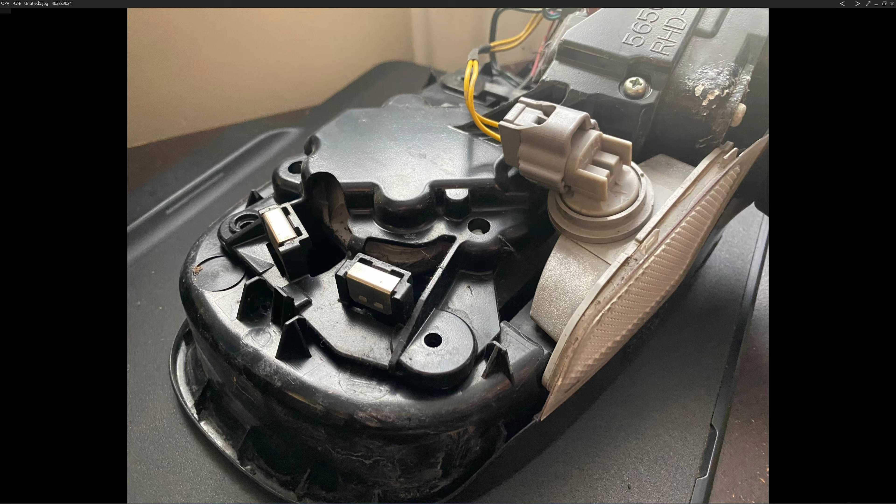Hi, in this video I'm going to do reverse engineering of this side mirror cover. It's a Lexus IS250 from the year 2006. This was sent to me by a viewer from this channel. He wants me to demonstrate how to reverse this part from the 3D scan data.

This mirror cover is almost 20 years old. It's possible that if you break it, you're not going to be able to find a replacement part, because most of the Japanese car manufacturers will keep their part stock for 10 years after they stop manufacturing the car. If you want to get the replacement part, you probably need to find it from the junkyard.

Okay, the part is made from injection molded ABS plastic. It has a standout edge here that represents the letter L, I think, which is the Lexus logo. Okay, so if you look from the inside, the side mirror contains a lot of mounting holes and clips. I can count 7 fixing points on this. So I will model the clips and the mounting points separately, because if I print it together with the cover, it's going to break easily.

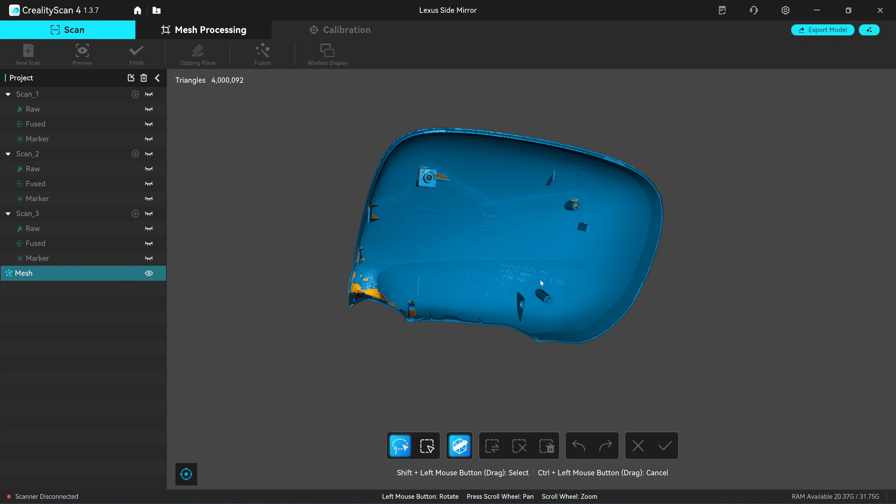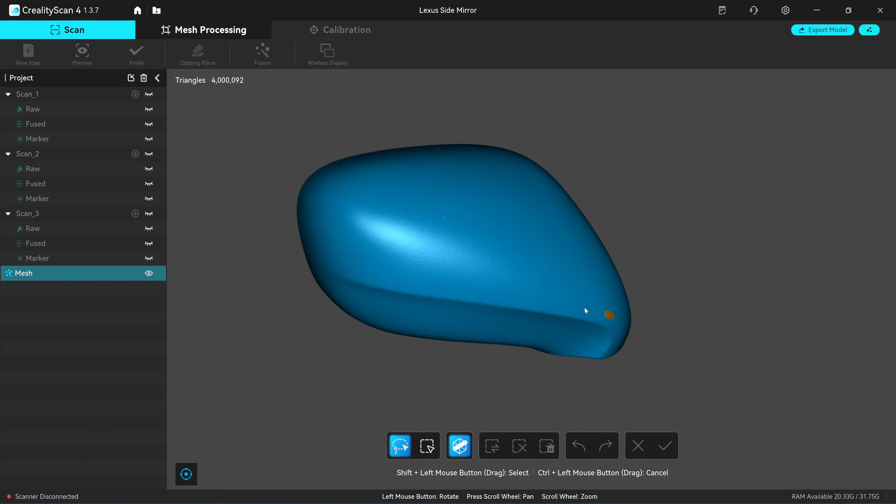Okay, this is the scan data that the viewer sent to me. He scanned the outer shell and the inner shell with 2 separate scans, and then he merged them together. The thickness of the wall is somewhere between 2.6 to 3 millimeters in some parts. The scanner that he used is the original Raptor from last year. Now it costs about $1,000 US. He used a 7-line blue laser mode to scan this part. So the detail of the scan is very high: 5.8 million triangles, and this one is 4 million triangles.

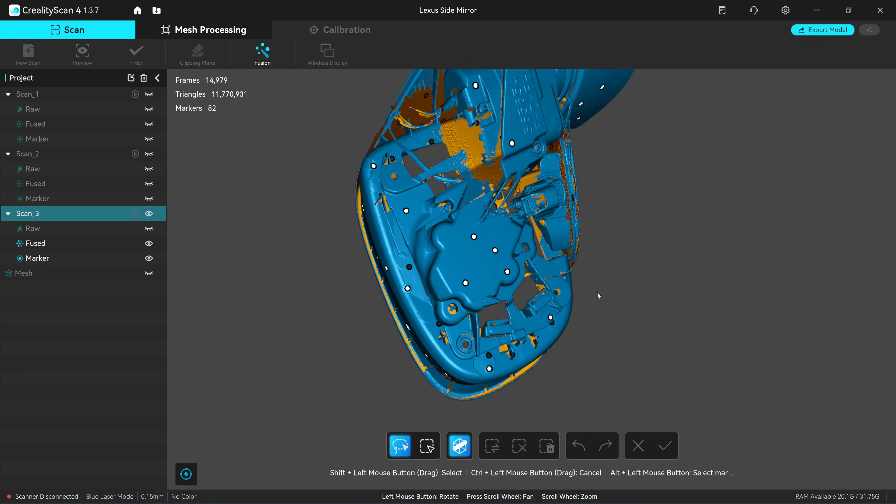He also made a scan of the fixing points. It's quite important if you want to reverse the thin shell. You need to scan the mounting point and know what kind of space you have, so that you can decide how you would modify the clips. In some parts the scan did not totally capture this part. To reverse this, I'm going to export the model as a point cloud, and I will also export this mounting point as well, and then I will align these 2 point clouds together in CloudCompare.

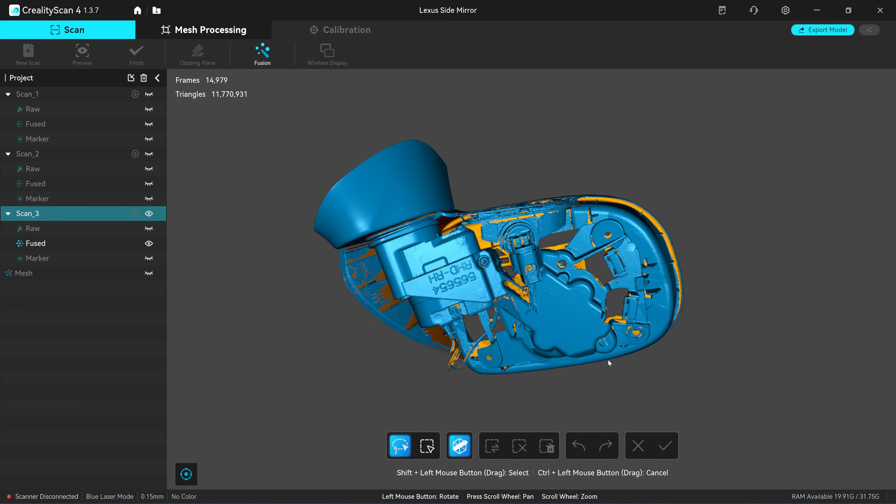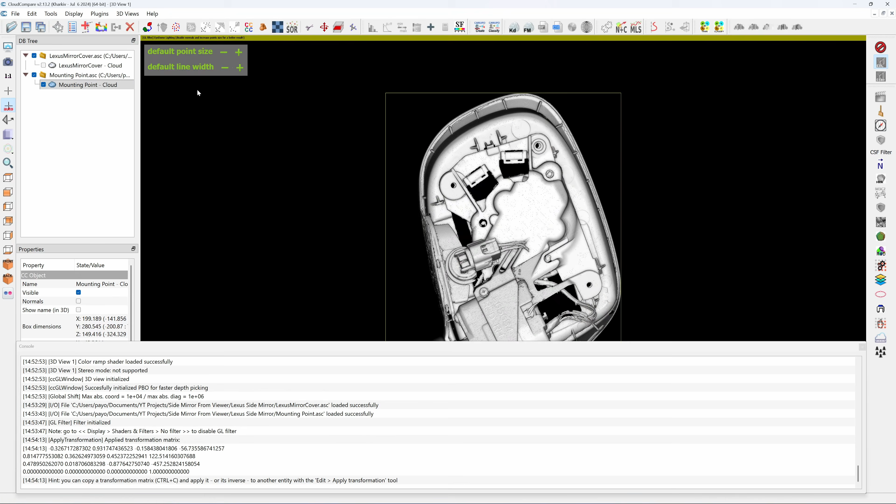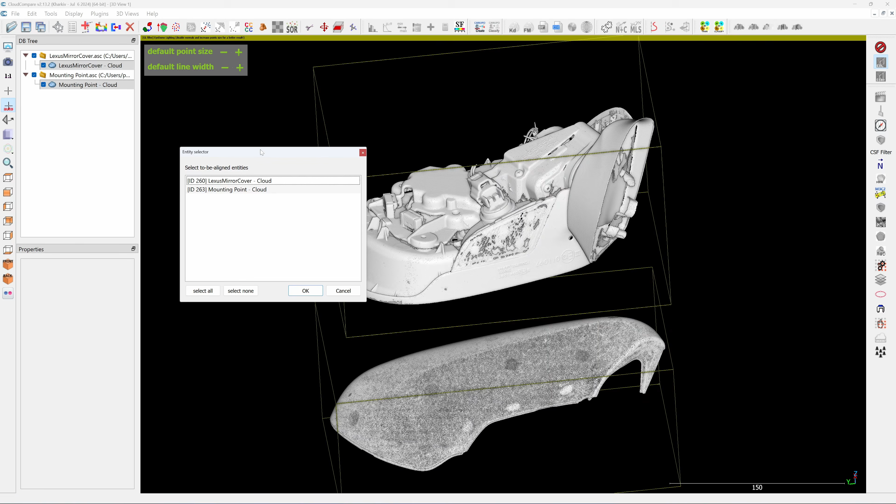Okay, next I'm going to align the cover to the frame. I need to find some flat points so that I can align it to the XY plane. And I'm going to move this to the origin point, 0, 0. Let me turn on the cover. So I'm going to merge these 2 parts together. CloudCompare has a merging function. I'm going to click on this function. It's going to ask you what will be the moving object and what will be the fixed object. I will choose the cover as the moving object.

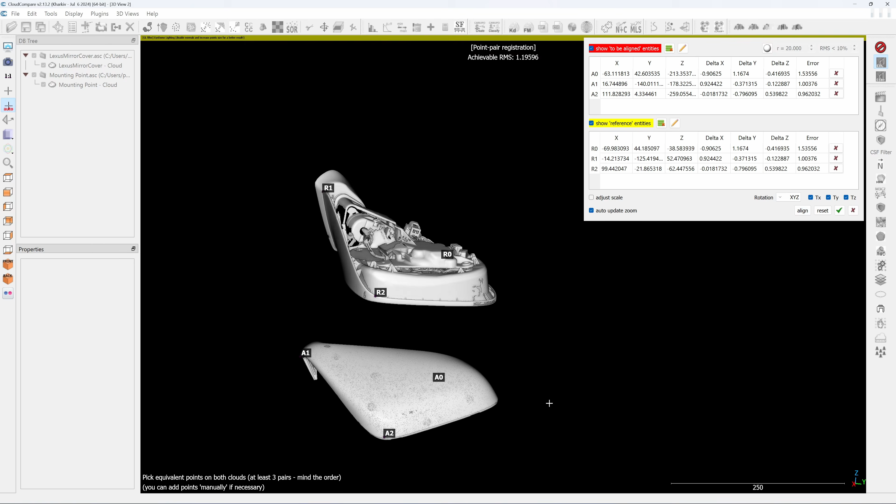Next you are going to choose 4 points. So I'm going to click here. This is the first one, A0. The next point, three points. Let's see, align. Okay, now it's aligned. You need only 3 points, not 4. And click on the check mark. So when you slice it, you can see the space available for you to modify the clips. And if you want to change the shape, you will know how much space you have left.

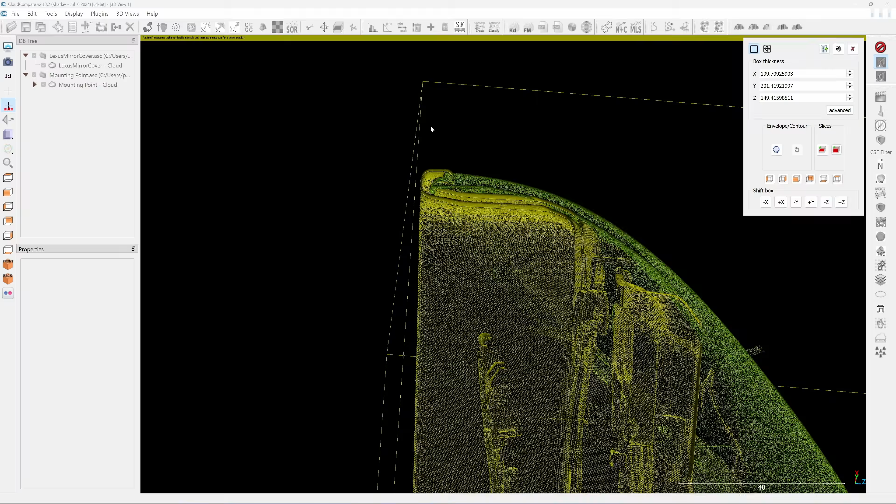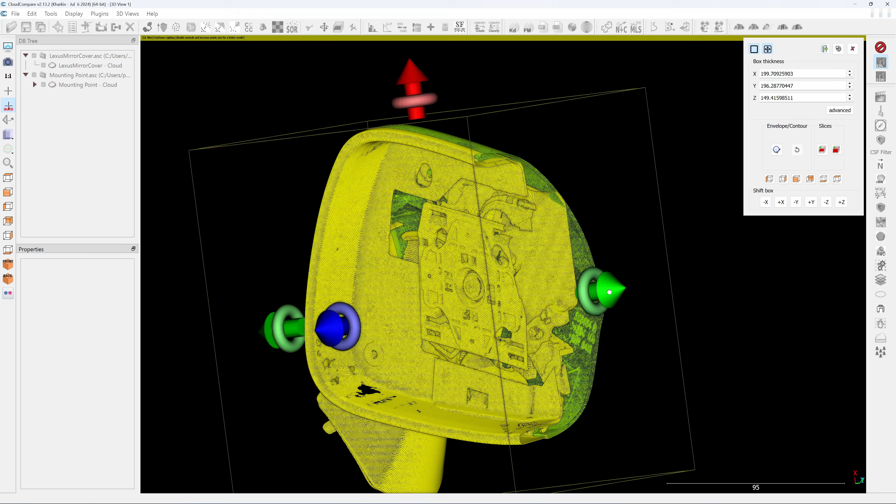If you look here, this is the rainwater protection system of the mirror cover. If rainwater gets in here, they have a special void here for draining the rainwater. The water will be trapped inside here, and it will not overflow to the internal mechanism of the side mirror. And if I keep slicing this channel, it will go down to this mounting. The water that is trapped inside the channel will flow into the side door of your car. This is the same for most cars, I think.

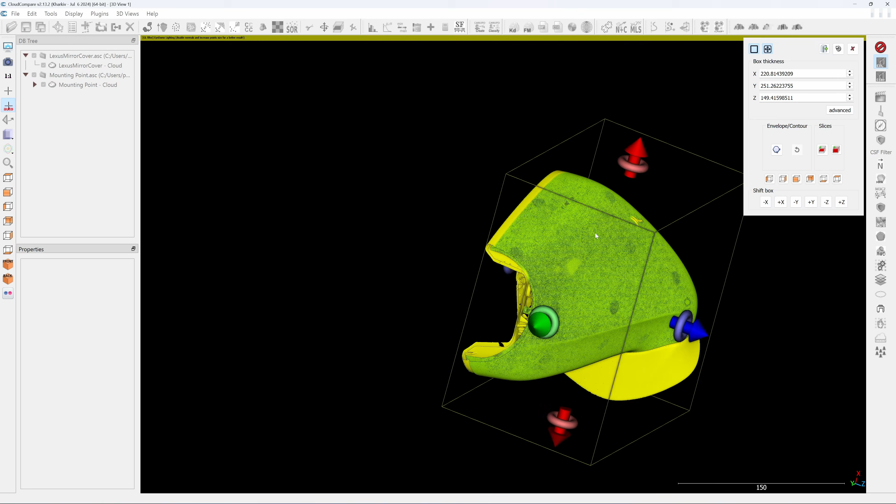So this water trap channel here is only on the top side. There is no rainwater protection for the bottom side. Okay, so next I'm going to import into Autodesk Inventor.

In the Autodesk Inventor, this is the import point cloud. So I'm going to turn off the mounting. I focus on the cover first, and when I design the clip, I turn on the mounting point clouds so that I can check the available space.

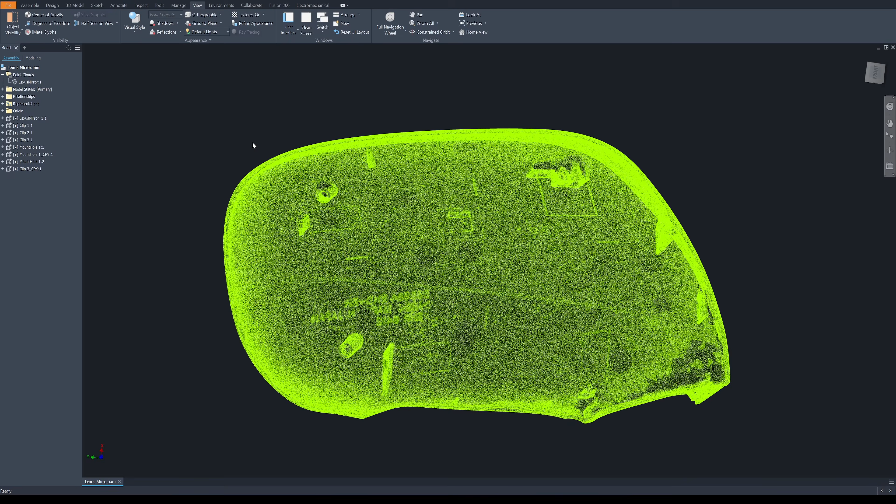In one of my videos I have already demonstrated step by step from the point cloud to making a first sketch on the Autodesk Inventor. So in this video, I'm going to go fast. And the functions that I use are only two functions, a loft command and extrude command. With only these two functions, I would say you can draw anything.

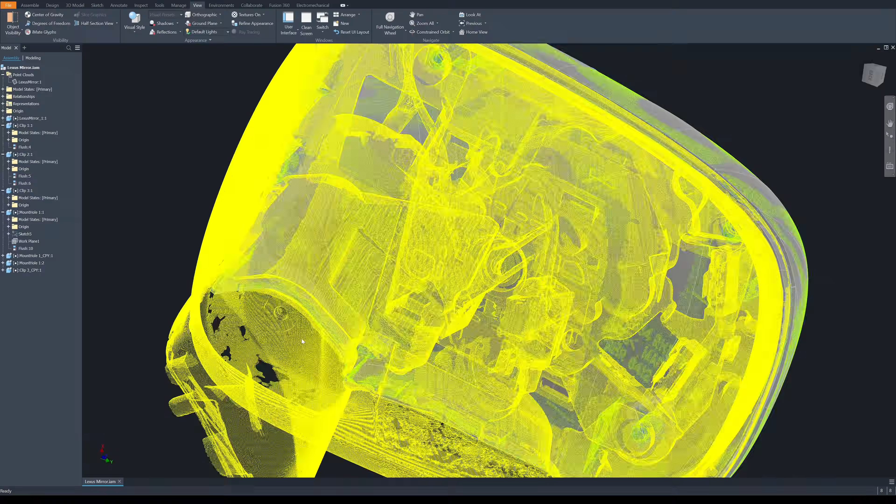Okay, so we have it, the Lexus side mirror. Okay, let's save this as the step files and send it to the slicer for 3D printing. Okay, here's in the slicer.

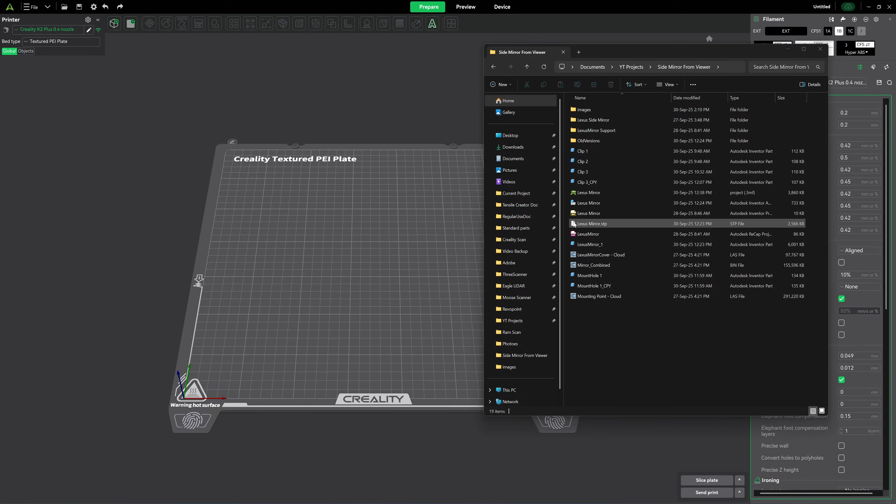I like to export the CAD file as the step files because most of the slicers today can open the step files. The slicer will convert the step files into a mesh. It cannot display the model from the step file. So in fact, the step file that you import will be converted into a mesh.

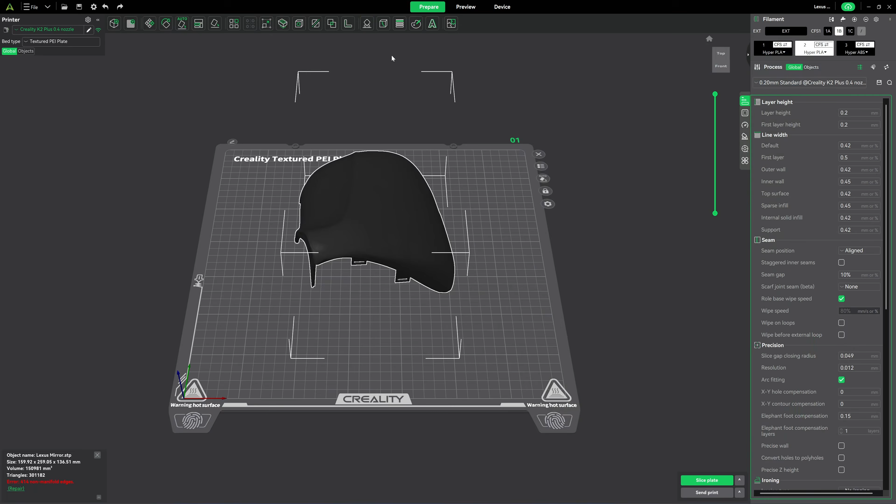Between the step files and the STL, the step file has a smaller file size. This whole assembly is only 2.5 megabytes. I have clips included in the assembly. So if I export it as the step files, I can export it in just one time. I can split it into the objects like this.

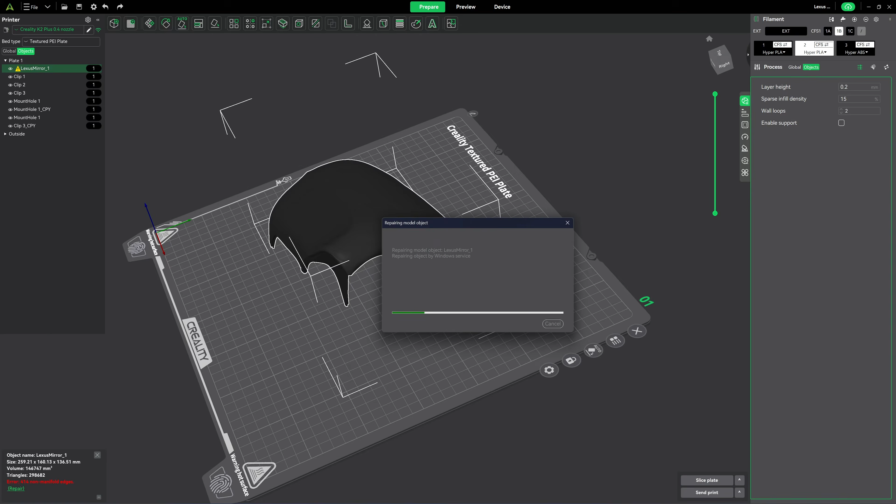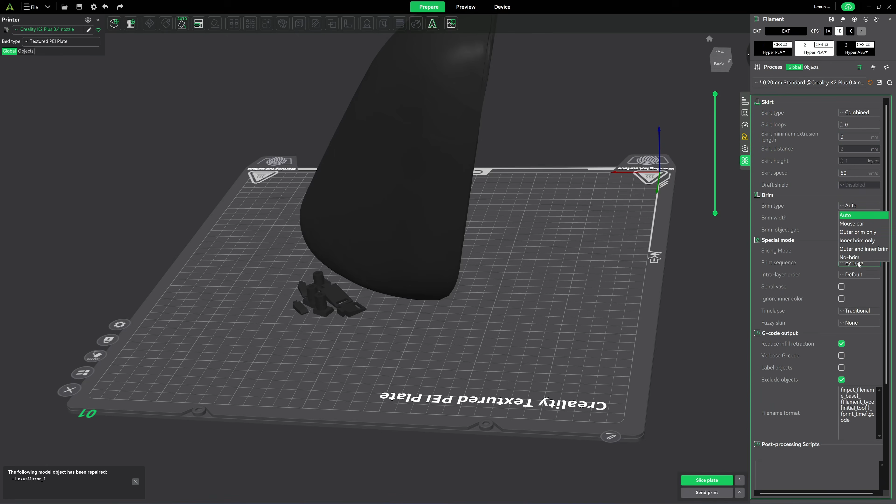Sometimes I need to repair the imported model from the step files, and I'm going to put this end onto the build plate. So I'm going to print in this orientation. Arrange it. I will need to use the tree support, and I'm not going to use any brim. Okay, let's send it to the printer.

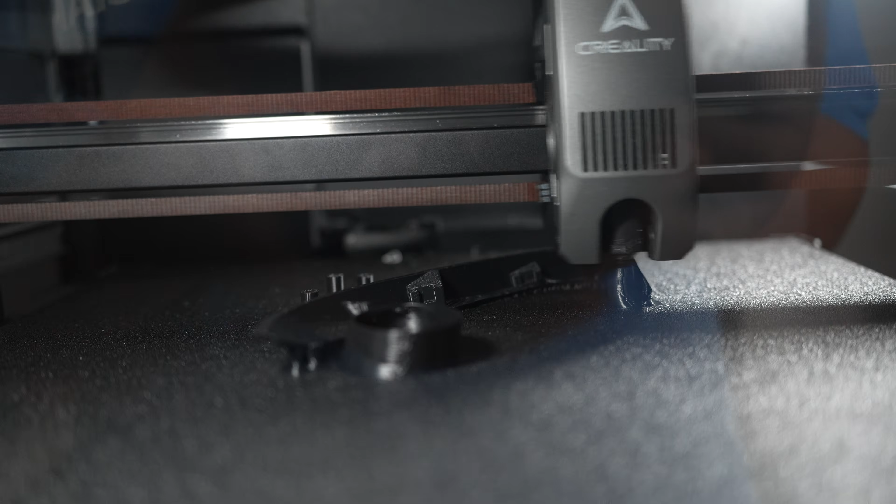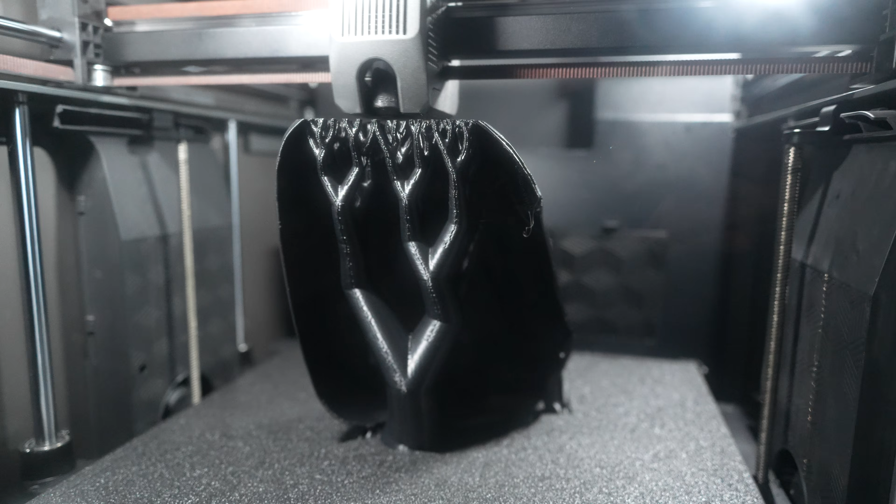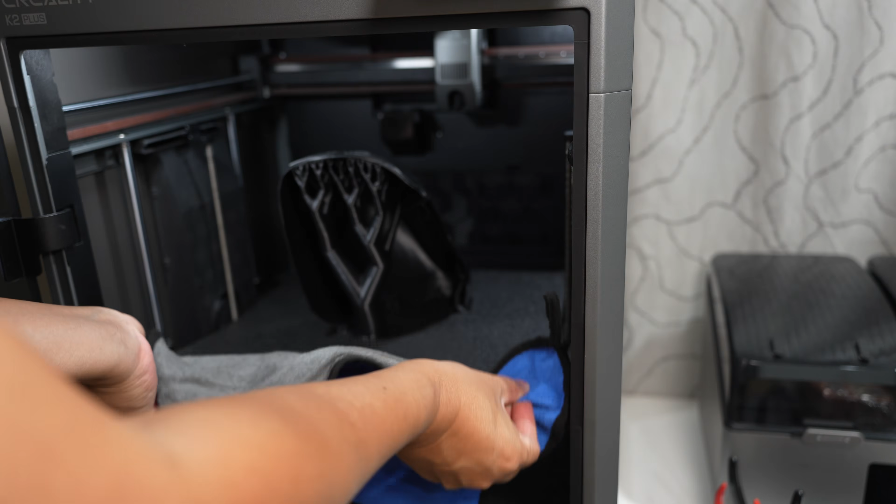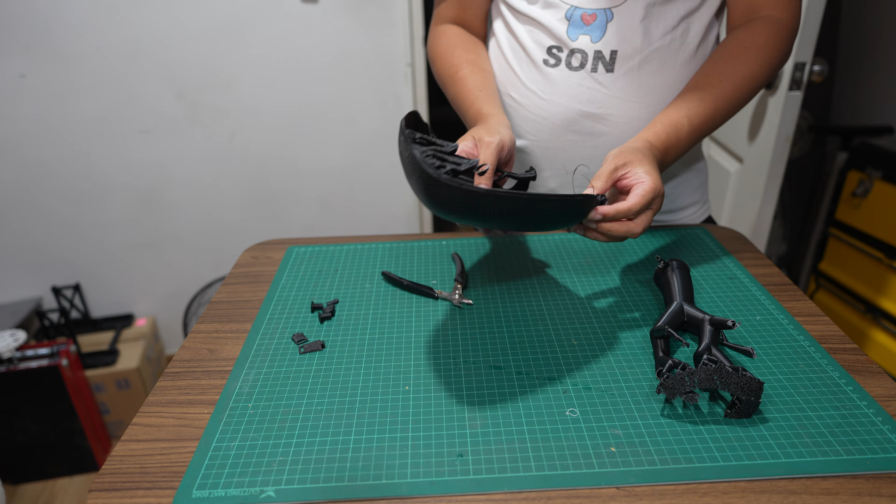I can see that the overhang is too much. I didn't put a support there. You're supposed to put adhesive in before, so this is the first one. Okay, this is the second one. This is the third one. So I use 0.1 millimeter for the clearance of the dovetail, so it fits quite well without the adhesive.

Okay, so I have very tiny small clips. It's very difficult for me to see this. Okay, let's check the result. I haven't sanded it yet. Just trimmed with the side clipper.

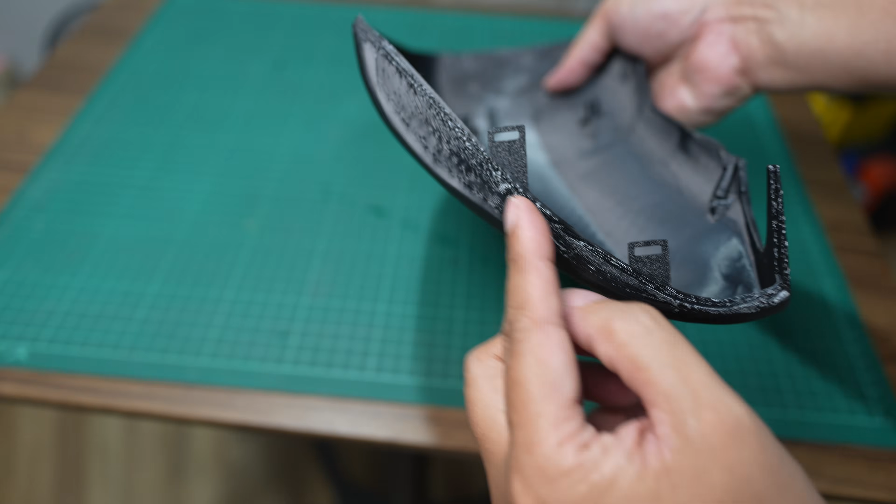This is one of the defects here, that I didn't put a support. If I put a support here, it's not going to happen. The overhang is too much, and this is what I expect. So this is the part with the support.

When you reverse with CAD, you have full control of the standout edges and curves of the object that you are reversing. So if you do this with the automatic surfacing tools, you are not going to see this. It's going to blend out. This would be a layer height. I can use a filler to fill this.

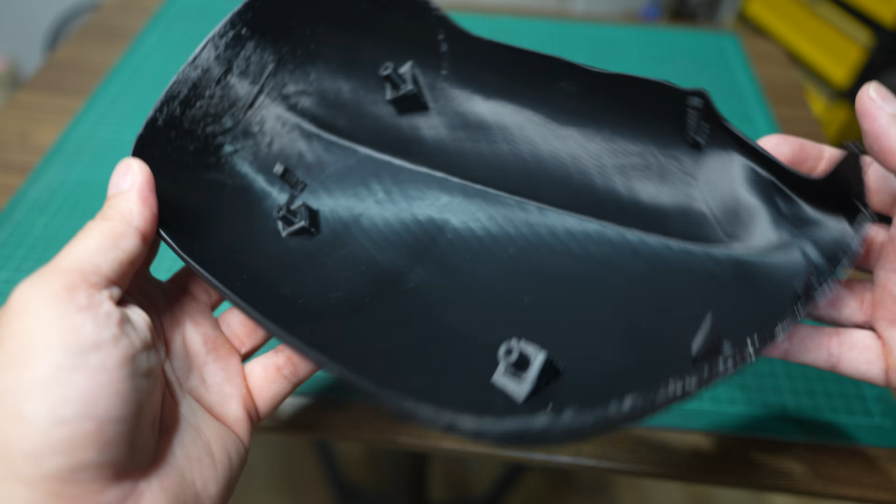And for the joint, the dovetail joint works quite well for this mounting hole. This one also. This one is a bit too small for a dovetail. I should simply make a wider base and glue it directly to the shell. And these two clips also work quite well. You don't even have to put in the adhesive. Just use 0.1 millimeter clearance and it will press fit very well.

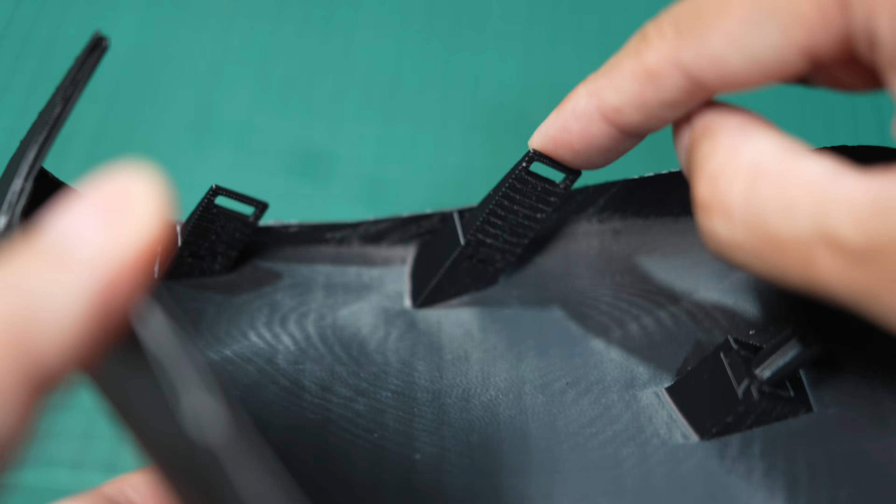So if you break the clips, you just simply remove them without printing the whole new part, which takes a long time. This one was 6 hours of printing time. Okay, so this is how I do it. Reversing the side mirror with just a loft and extrude command.